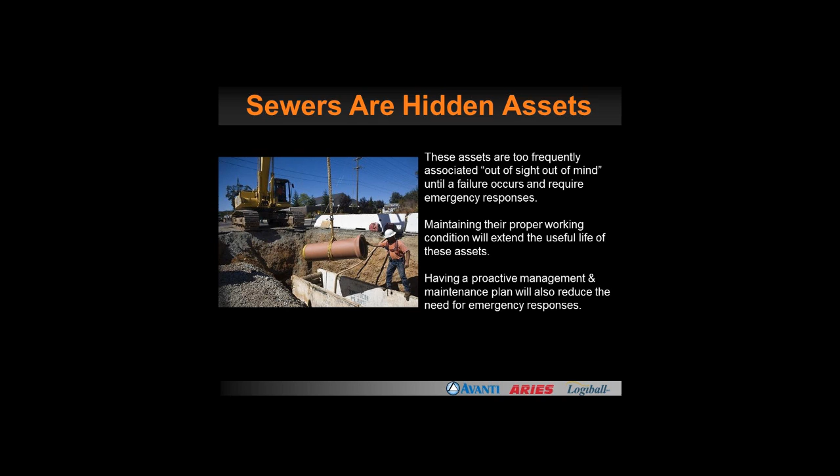These assets are too frequently associated with out of sight, out of mind. Here's a piece of pipe being laid. The pipe is only a part of the system. In order for the system to work correctly, the pieces of pipe have got to be aligned together. Maintaining their proper working condition will extend their useful life, and having a proactive management and maintenance plan will also reduce the need for emergency responses when we have failures.

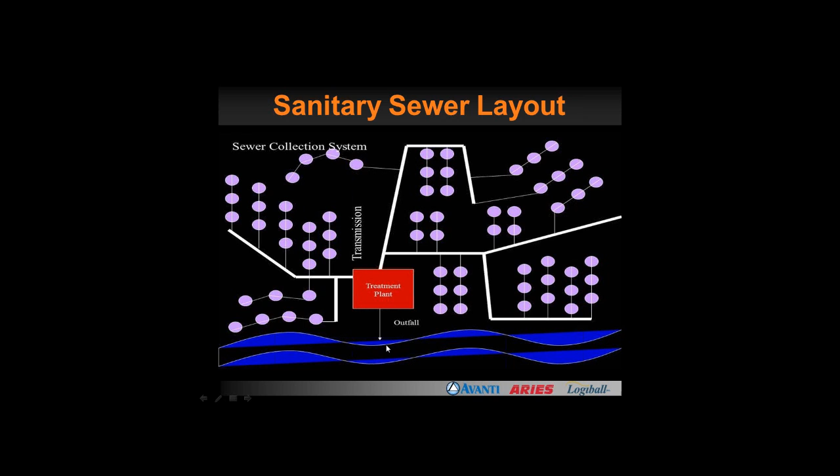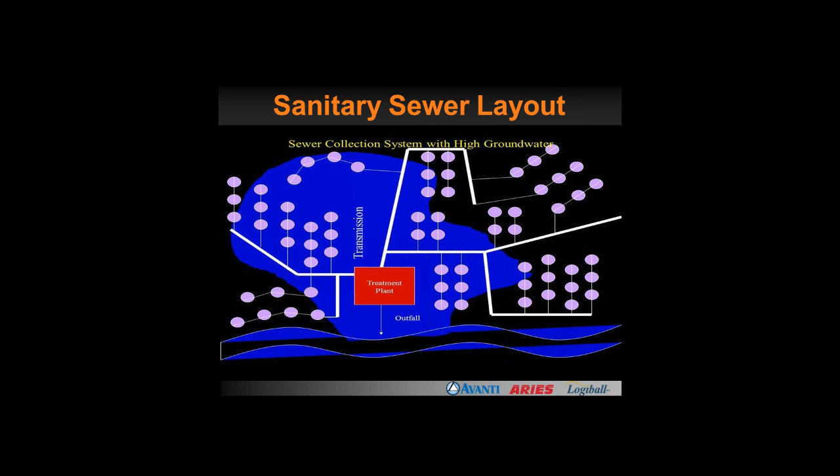Here's our sanitary sewer layout. We have our manholes, our main lines, laterals, and transmission lines. All of these are directed at the treatment plant where they will be treated before being released back into our rivers and streams. In some cases, part of our collection system is underwater, and if water has chances to enter our collection system through the joints, laterals, or whatever openings are there, we will get events like surcharges and SSOs.

In our sewer system, we have our manholes, easily accessible, we can open them up and people can go down and fix these things. We have our joints, which allow groundwater to come in, and our service lines, which are basically the least accessible and which eventually contribute a lot of groundwater infiltration.

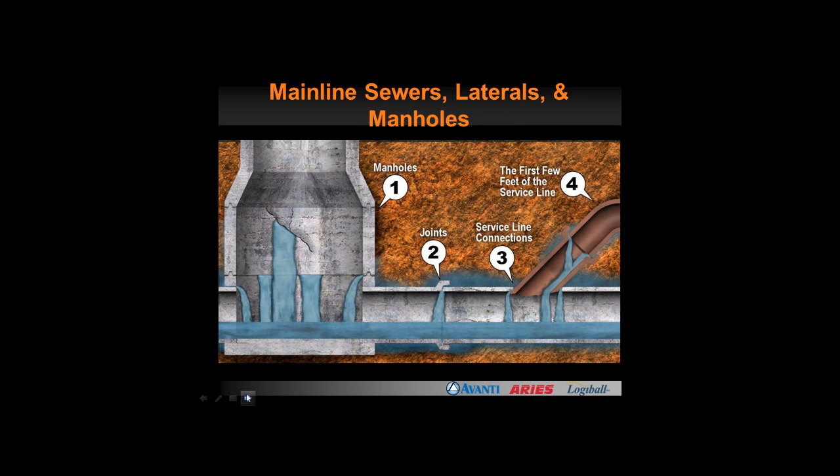So what's the problem with I and I? Well, according to the EPA, infiltration and inflow represent almost half of all the flow at the treatment plants. So it becomes a huge problem. It's our tax dollars at work, and it also means overflows can happen and basically damage the environment.

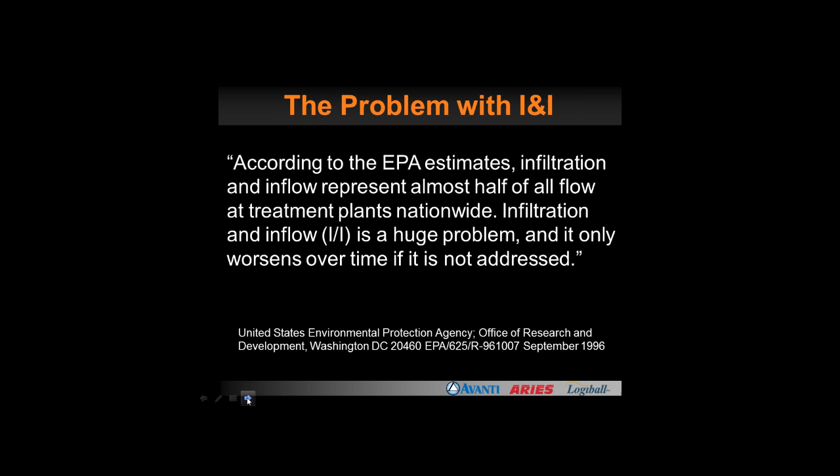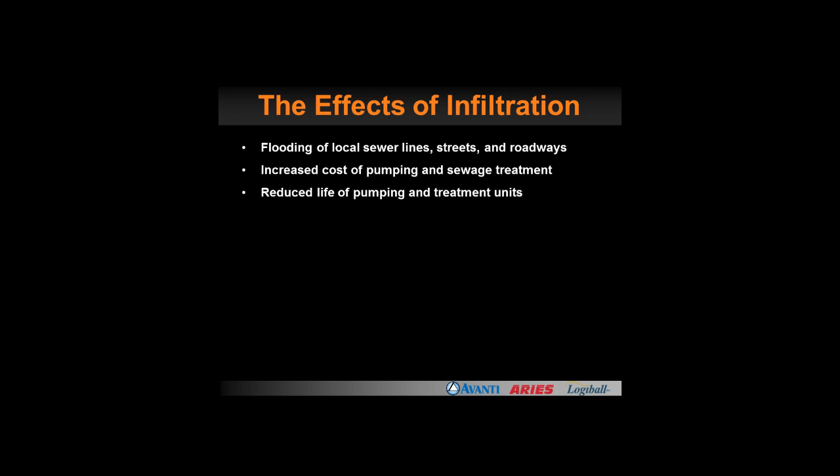Flooding of local sewer lines, streets, roadways. Increased cost of pumping and sewage treatment. When that pumping station's running 12, 15 hours a day versus 8 hours, it's money basically going down the drain. If that pump is also working 15 hours a day, that means its useful life will be decreased over time.

Increased risk of SSOs resulting in fines. Depositing of fine soils resulting in reduced capacity of the sewer collection system. As groundwater enters the system, so do some of the fines of the backfill.

These fines coming in create areas of loose soils adjacent to the defects, so we're not supporting our joints or connections as we used to. This is a potential loss of backfill support for the pipes, which eventually can result in structural issues and failure of the pipes.

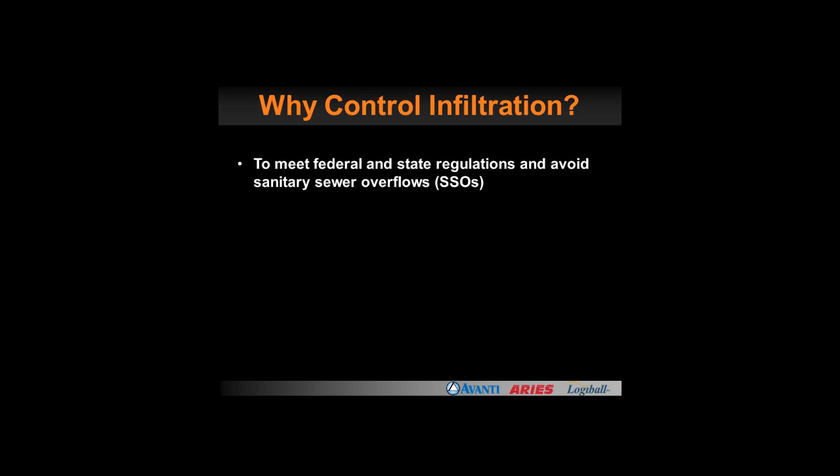So why control infiltration? Well, basically, first thing is to meet federal and state regulations and avoid these SSOs. Reduce our costs in the operation and maintenance of these systems. Avoid man-made sinkholes and damage to transportation infrastructure and other infrastructure, and reduce treatment costs of the wastewater.

No one likes to see their sewer bills go up. And of course, we want to extend the life of this precious asset.

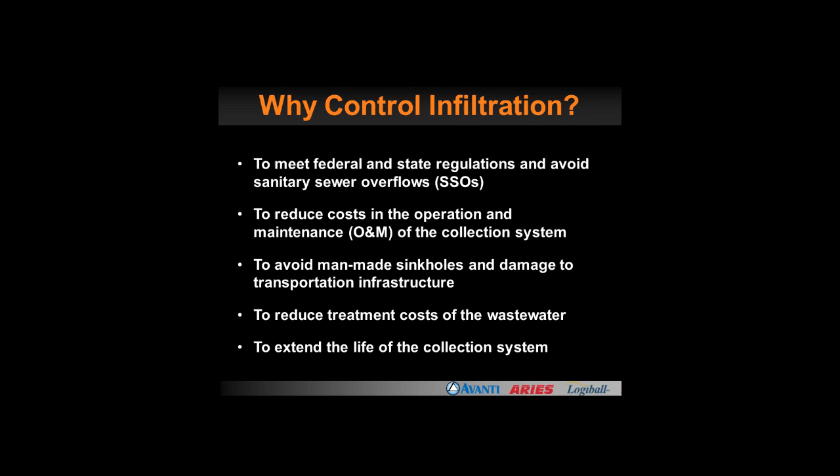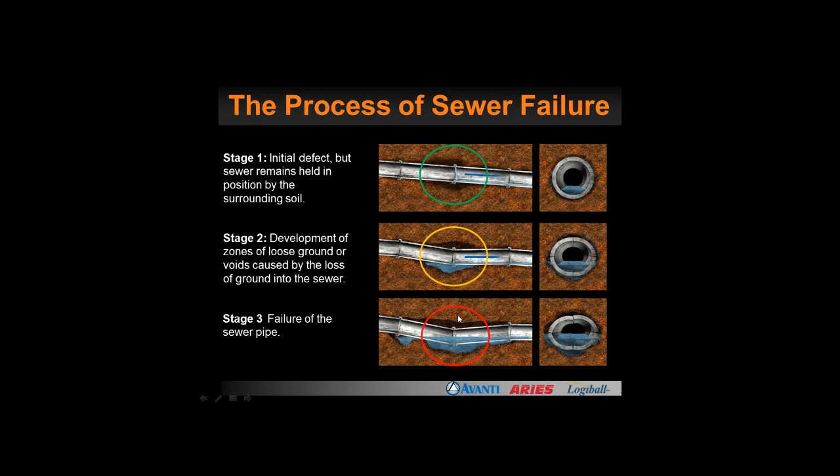On the left here is a view of what we see with CCTV cameras. We have a circumferential crack, which is basically like a joint, which allows groundwater to come in. As this groundwater comes in, so do fine particles.

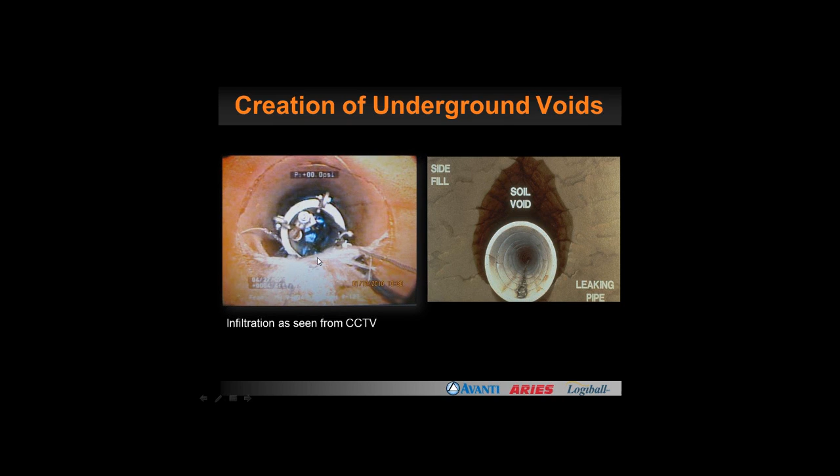And if you look at the picture on the right, eventually we get voids on the outside of the pipe. So it's not only the groundwater that we have to treat, but it's whatever's on the outside of the pipe.

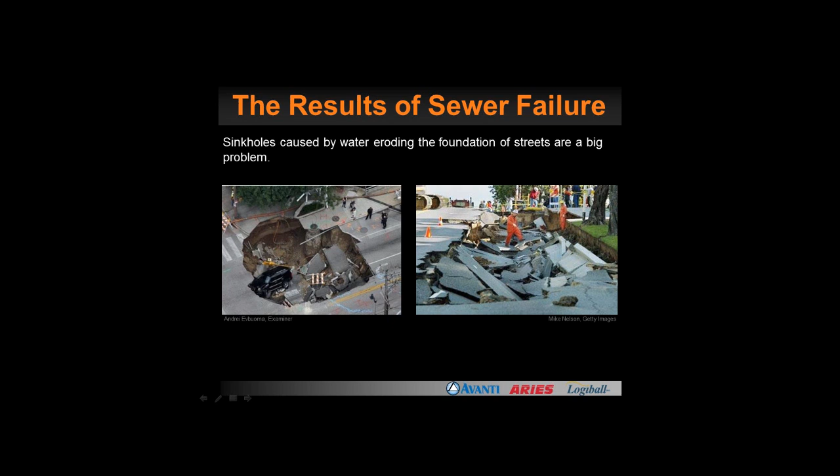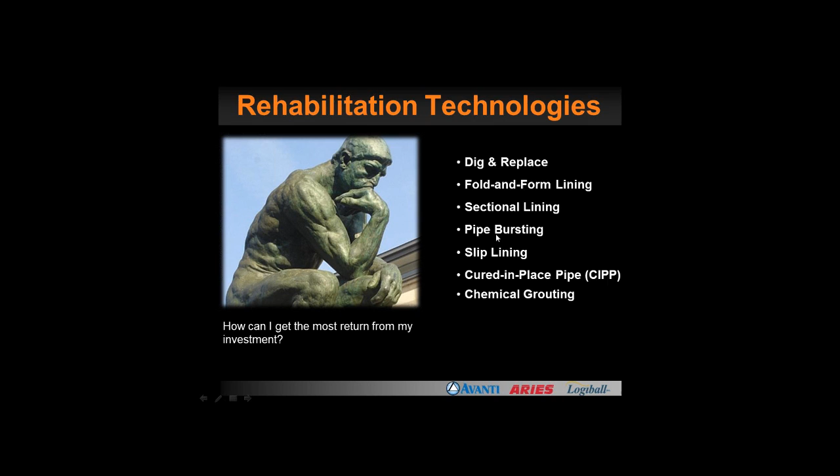So how can I get the most from my investment? What do I need to do? What can I do? Well, we have options: dig and replace, fold and form lining, sectional lining, pipe bursting, slip lining, cured-in-place pipe, or chemical grouting. Which one will stop the leaks?

First, what is chemical grouting? Basically, it's the injection of two components that are pumped in and around voids, the pipe, and manhole structure to stop infiltration and exfiltration, stabilize the surrounding soil, stabilize the pipe in return, and seal the annular space between the host pipe and the liner.

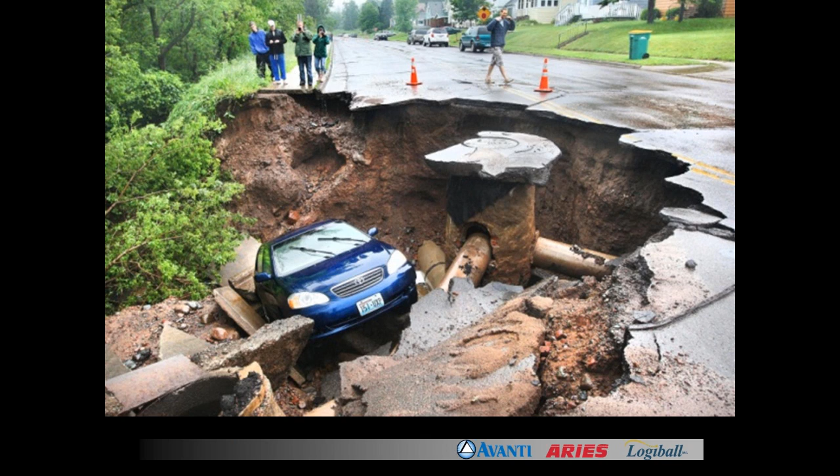Something that this photo does for me also is it reminds me of the fact that it's a whole system that you have to stop the infiltration in. So you can't address only the main line, you also have to address the laterals and manholes and so forth. And even if the municipality says we're going to do lining of main lines or lining of manholes, you still have to stop the infiltration in order to put on that coating for the manhole or put on that liner.

Similarly, you could just drill a hole straight through the manhole and pump the same chemical that they use to seal main lines and laterals. You could pump it into the soil and encapsulate the manhole. It takes about 60 gallons of grout if you have a standard 10-foot by 4-foot manhole.

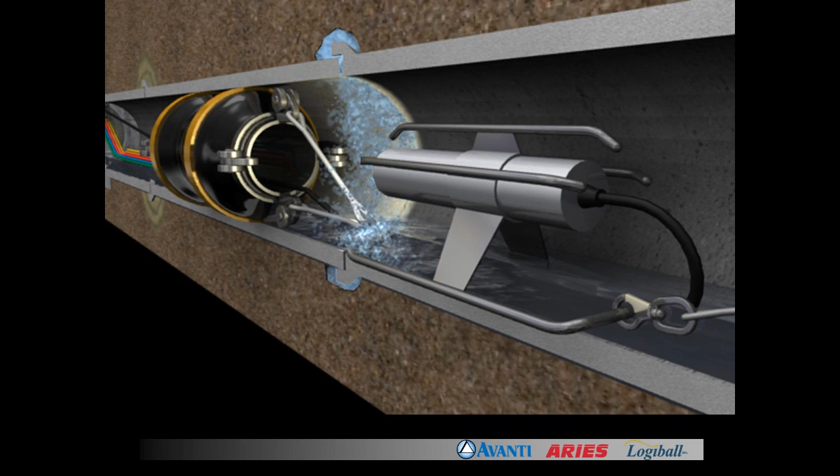So they're going to stop the infiltration here before they line it. If you're in a mainline scenario, contractors will often, before they line, grout the gushers, the highly active leaks in the main lines, because that infiltration coming in could cause a bubble in the liner, which will decrease the capacity of the pipe.

The municipalities don't want that for sure. It can also cause resin washout, which will weaken the liner at that point. So they may grout beforehand, and then after they're done lining, they could just grout these cracks at the lateral connection.

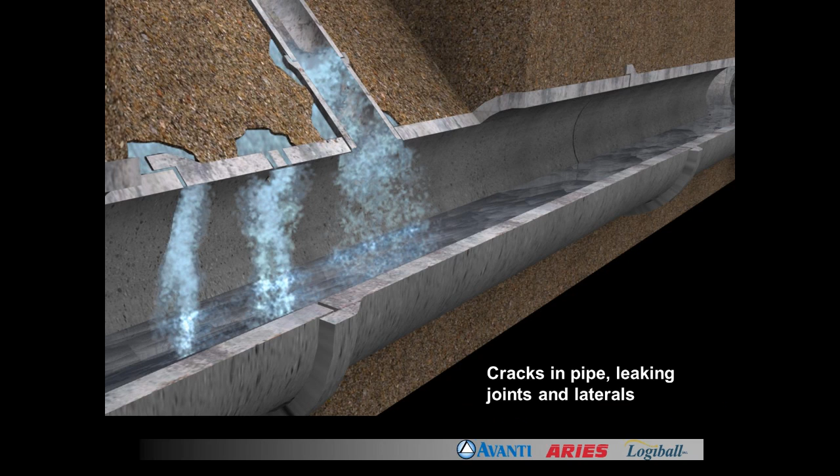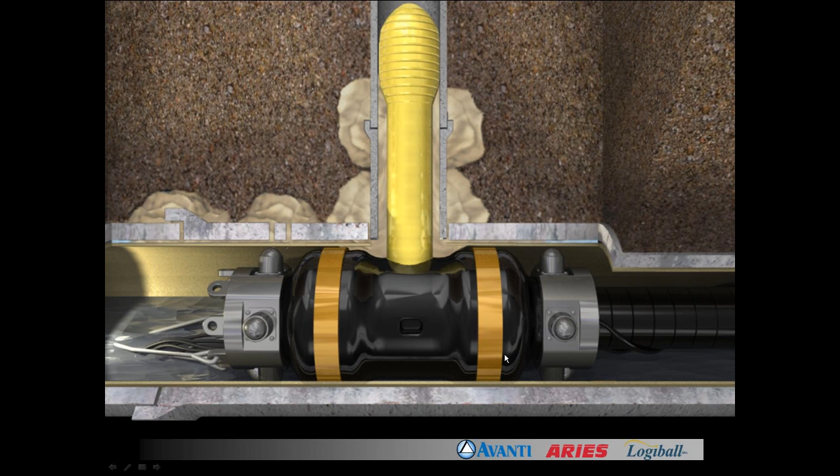So they can position a packer over it, and the grout, because it's the same viscosity as water—about 1.2 to 1.5 centipoise—travels in the annular space between the host pipe and the liner and cures, becoming solid. It also goes out the cracks or joints into the soil on the outside, and that's really the goal. That's where you want it.

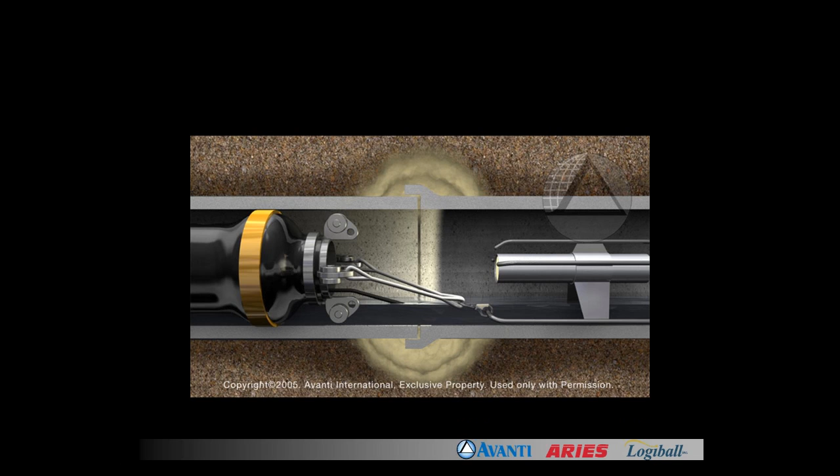There are several myths about grouting, one being that the grout only seals the joint itself, where the red circles are, only an inch or two. But the reality is the contractor should pump enough grout to get it into the soil. It's really a soil sealing process—it fills all the voids between the gravel or sand and creates what we call the gel soil matrix.

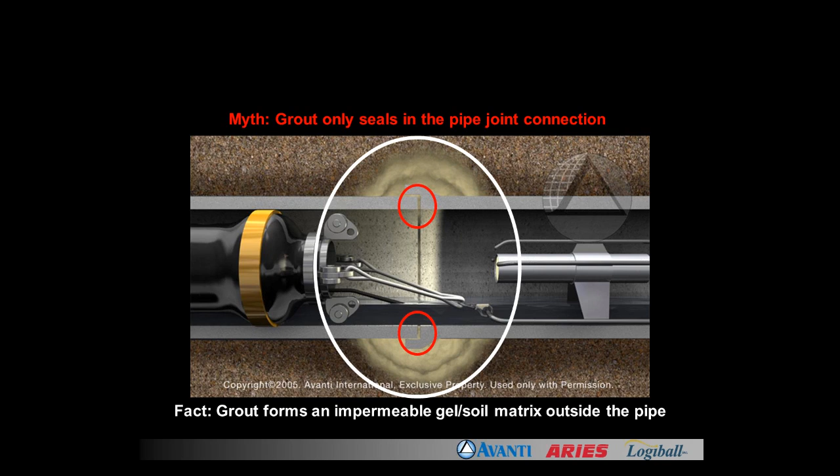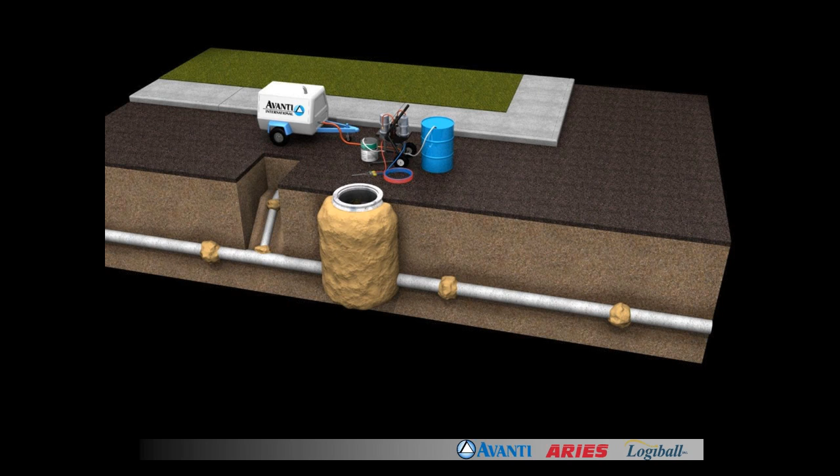This is a great image, and if you can take that one and lay it over, this is an animated version. You can see this is the completion of grouting the system. Maybe they started with the main lines here. You've got your grout donut, the lateral connection, several feet up the lateral—usually it's standard to go 3 or 4 feet.

There's a very well-known case study where they went 38 feet up the lateral and sealed every defect in the lateral. The manhole has also been encapsulated, and rather than chase the water from crack to crack in the manhole, if they curtain grout it like this, then water can't even get to the structure, just like water can't get to the joint here.

So much of this presentation is about sealing the entire system, and I'll introduce you now to Dick Schatz, who's going to talk more about it.

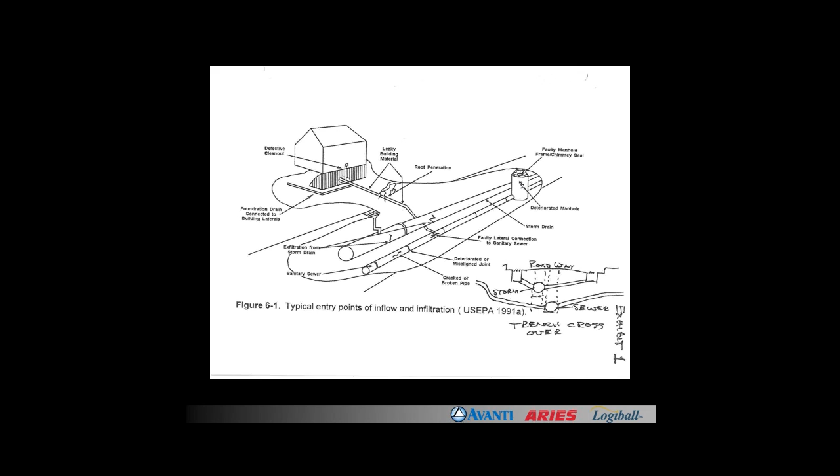You heard earlier 5 billion feet of sewer pipe. Of that 5 billion, if you just look at the collection system alone, it's at least 1 billion feet for just the collection, not the services, not a lot of other things. But take that and look at it, you're going to have at least 500 million vitrified clay joints poured prior to 1970.

In the 1970s, we switched to more modern synthetic rubber joints, and things certainly improved. But here you can see the old hand-pour job going on: fill the pipe in behind it, pour the joint, move on. What you have here is beautiful vitrified clay pipe that will last 200 to 400 years. But your sewer won't last that long because your joints are going to fail. You lose your joints, you lose your sewer system, slowly but surely.

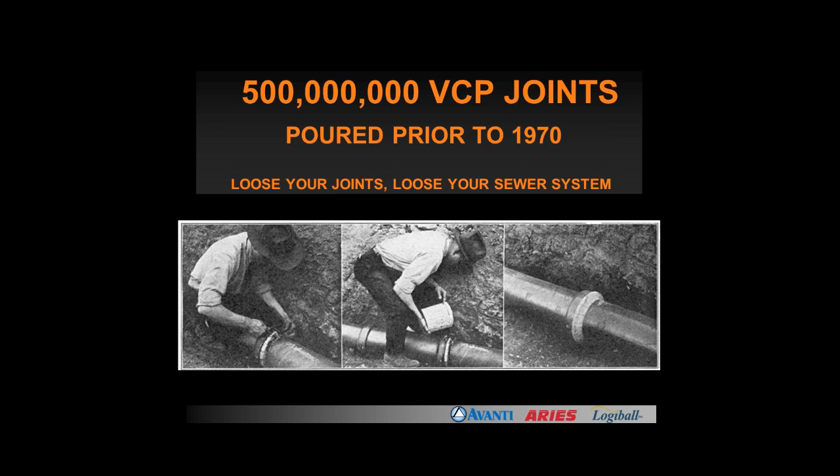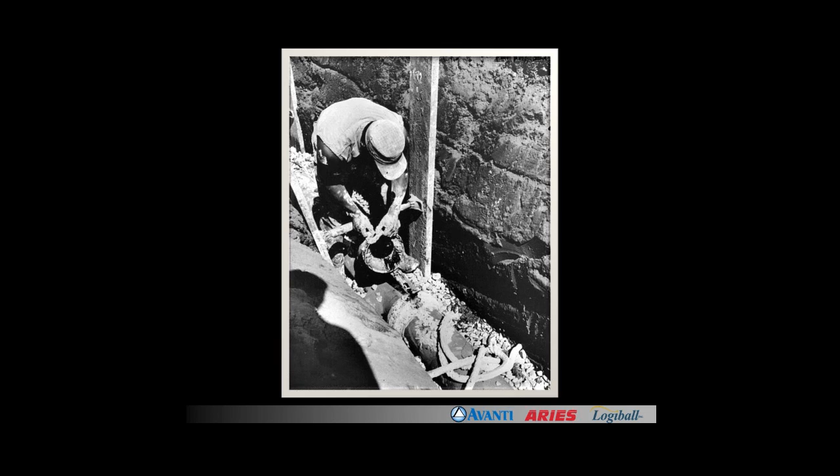Here we are pouring more joints. You'll notice sand on the outside, a great big dug trench. This whole thing creates an underground, you might call it a French drain, on the outside of the sewer pipe. So anywhere there's a failed joint or a place for water to enter, it'll enter into the sewer system. Here you see gravel used as backfill.

Joint air testing and grout sealing is a solid, proven way to sustain your vitrified sewer collection system, because you've got to do something to those joints. You cannot line every pipe. You've got 2 and 3 foot long pipe segments, 8, 10, 12, 6 inch, and that's the majority of your collection system. Those joints are every 2 or 3 feet, and therefore the chance of failure over time is extremely high. First 1 or 2, 3 or 4, but over time more will fail.

So we talk about sewer system maintenance. It really is a 3-step process today: you clean the pipes, you TV inspect, and you evaluate. That's what we probably have been taught to do, every 10 or 15 years is the theory. I don't know if that happens in many municipalities. Sometimes I know they're going through for the first time. You can tell by the amount of solids coming out.

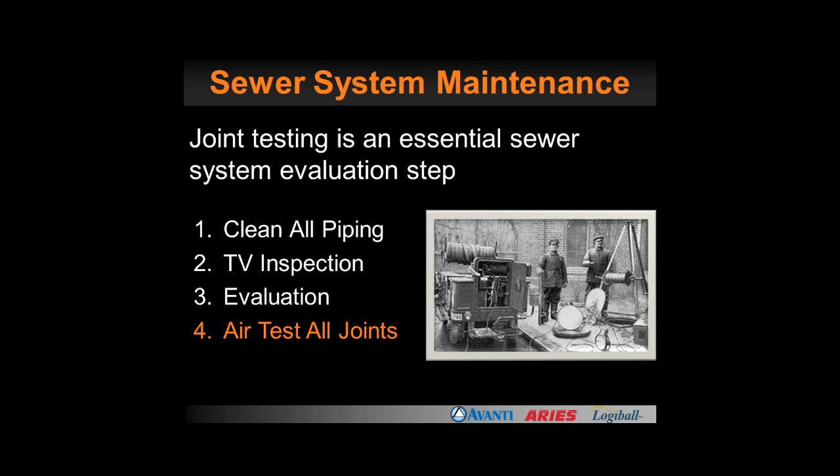The next step we really have to look at is to air test all the joints. If you do a manhole-to-manhole run of about 300 joints, you're able to tell if 2 or 3 or 5 joints are failing, or if none of them are failing. So that's an important step.

If you're going to test the joint, it's very easy at the same time to grout the joints that have failed. So if you go into a line and you test 100 joints from manhole to manhole, and you find 10, 15, 20 joints that fail, you grout them. You now have sustained that sewer system. Now you're able to write a meaningful evaluation of that inspection, because you did both the physical inspection for cracks and breaks, and you did the joint test, because you can't tell failed joints just by looking at them. You would say, oh, I see the staining, but you don't always see that staining.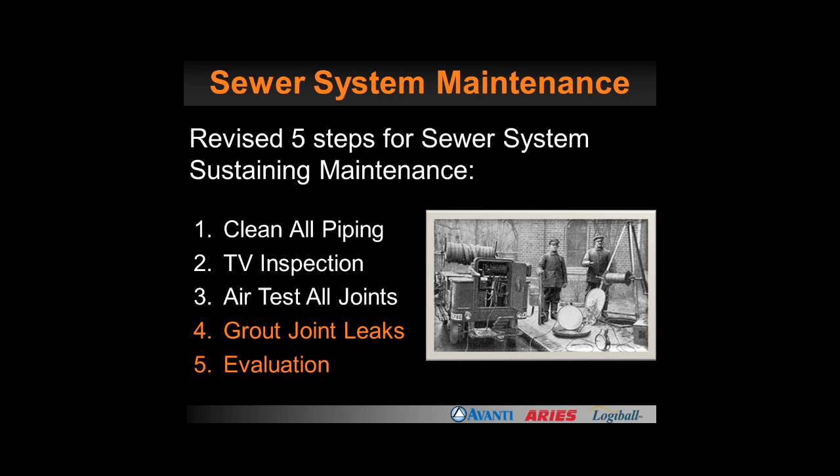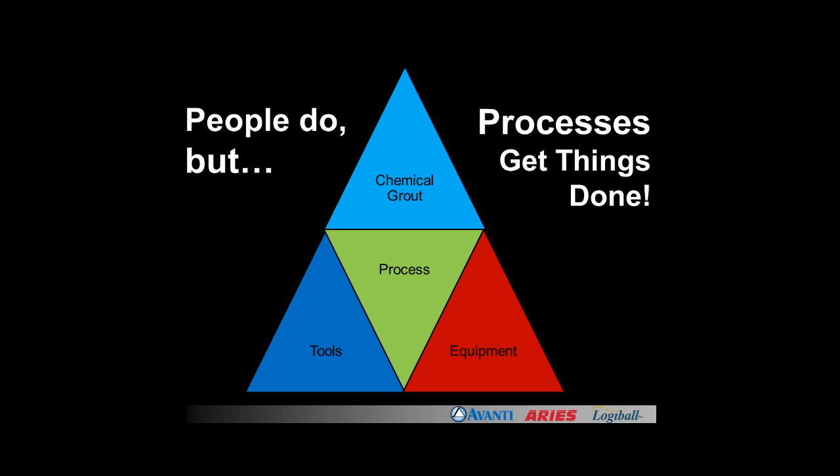Okay, what is this thing, this test and seal process? We're going to talk about that next. Basically, people do things, but if you get a process going and a system, processes are going to get things done. And that's where the three of us have come together: chemical grouting with AVANTI, Logiball with the tools, ARIES with the equipment, and you have an integrated process.

So the test and seal program, if you're going to have a program in your community, it's basically 5 steps that have to be taken to be successful. You've got a process—that's the grouting process. You have a system—those are the tools and equipment that make it happen. You have procedures to be followed, not just doing it however the last guy told you. There should be a more organized procedure for carrying out the work. And records have to be kept.

10, 15 years from now, or even shorter, a week from now, a month from now, or 2 years from now, will you be able to tell which joints were grouted and how much, and which joints passed the test but 2 or 3 years later fail and need to be grouted again?

The 5th part is education. With the turnover in people, both at the community level and due to age, education is an important step in this whole process.

Let's talk about the process itself. One is air testing. We're testing the joints for watertight integrity, stopping infiltration and exfiltration. Both of those things are damaging to the backfill, and the backfill is what supports the joints. Originally, some joints had no joint material at all, then tar was used, or oakum, or cement, whatever they had.

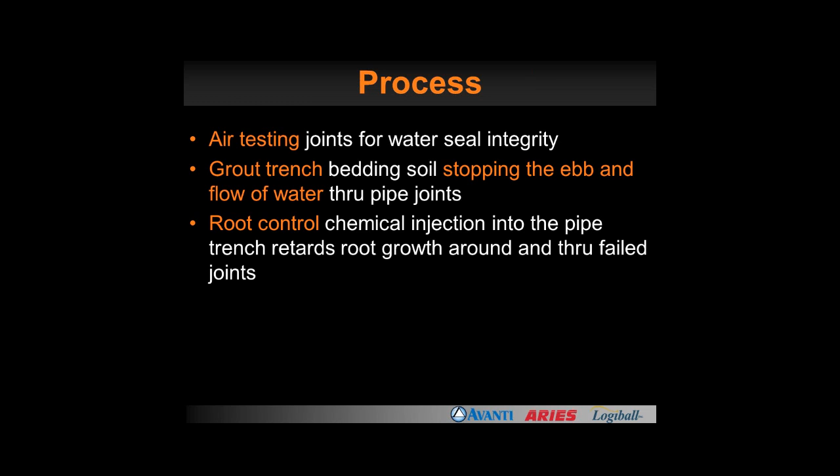Lastly, we don't talk about it much, but during the grouting process, root control chemicals can be included in the grout mixture. While it may not stop roots, it will certainly retard them if you inject enough grout. That's important because roots are very hard on sewer joints - any little crack, a root will crawl through it.

The system is basically an integrated TV, air testing, chemical pumping and injection setup - equipment designed to arrive on a job site, a manhole, and achieve the desired results. The chemicals are designed and mixed to achieve that sealing objective in the environment they exist in, underground, being diluted with or displacing groundwater depending on the situation.

Test and seal joint packers - these are the actual tools located over the joint, and you've seen how those work earlier.

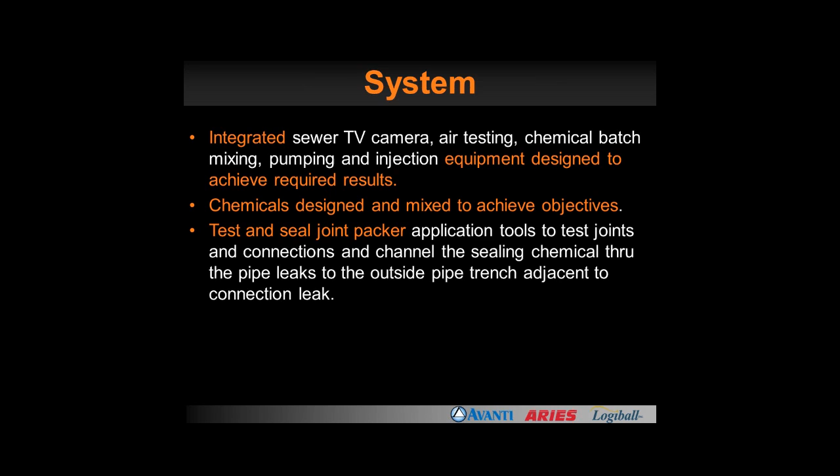Procedures - all these things fit together: methods and specifications, and confirmation tests that the equipment is performing correctly, because the operator can't see the equipment. All he can do is watch his monitor, his meters and gauges, in the control room.

The chemical mix confirmation: is the grout mixed the way it should be, as instructed by the chemical grouting company that supplied it? Test and seal - the results have to be confirmed. Is the joint in fact sealed after you inject the chemical?

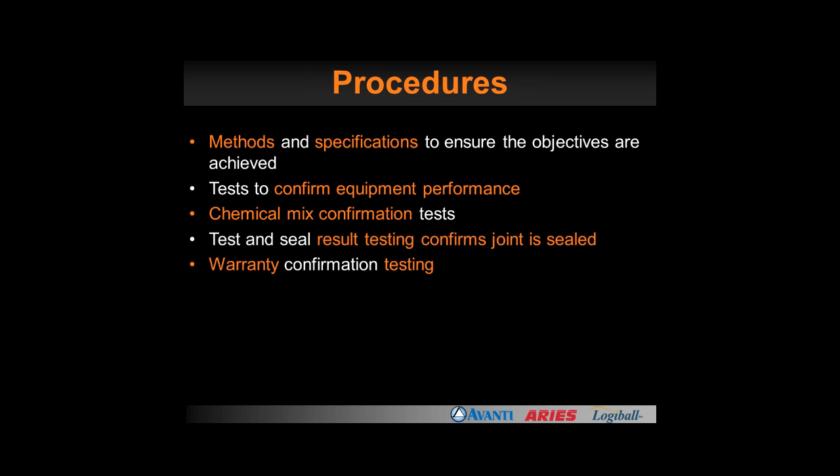And lastly, procedures require warranty testing. This is stuff Mark touched upon earlier. It's part of the ICGA recommended standard.

Record keeping - you're really talking about 2 types of records. One, you've got a grout mix data sheet. Here you keep track of the job, some information about the sewer, the packer to know how big the void is, and what the grout mix itself is.

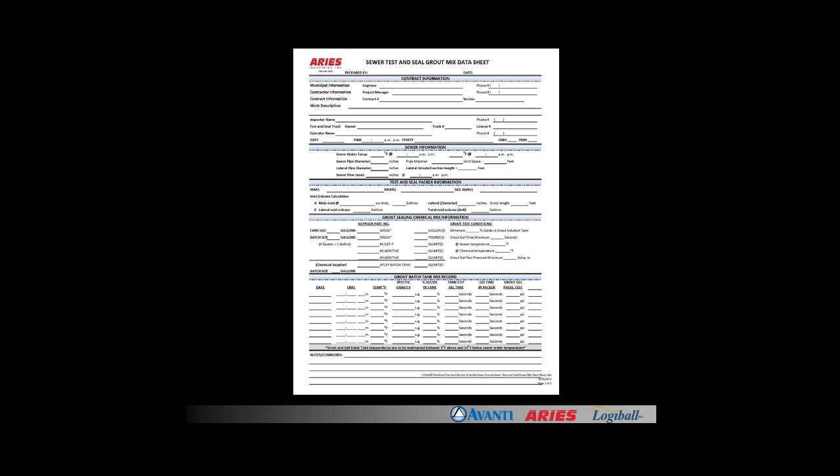How did you mix it? What was the chemical ratio? Did you mix that every time? Below that, you keep a running record of every mixed batch.

Education - this has been a tough one. About 8 years ago, the three of us - AVANTI, Logiball, and ARIES - started the Grout Boot Camp. It's held once or twice a year, with anywhere from 15 to 30 people.

It's a hands-on grout training course. We review the grouting process and the specification requirements. We talk about the new NASSCO ICGA spec, the equipment, and its operation and maintenance. This is all hands-on. Chemical safety is an important step.

Chemical mixing and testing is another step that isn't really common on many trucks. The tools - the grout packers and the injection guns - how do you maintain those, how do you fix them, how do you make sure they're running right? And lastly, there's system integration - you put it all together and show how it works.

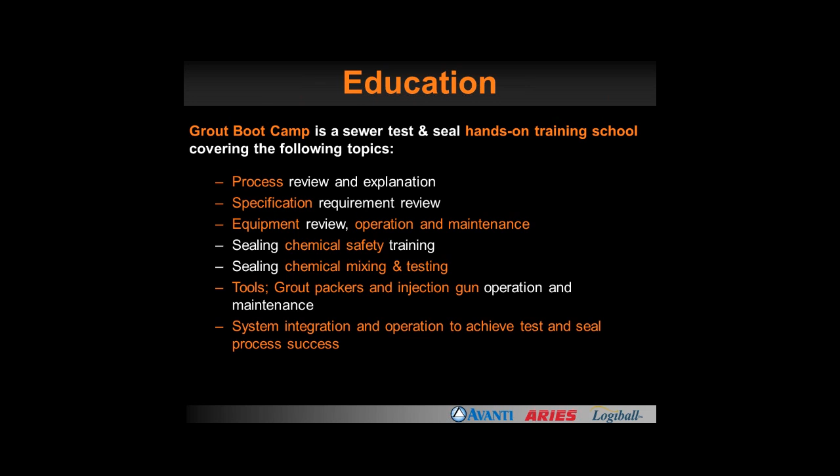All right, Dick, Don, I think it's yours.

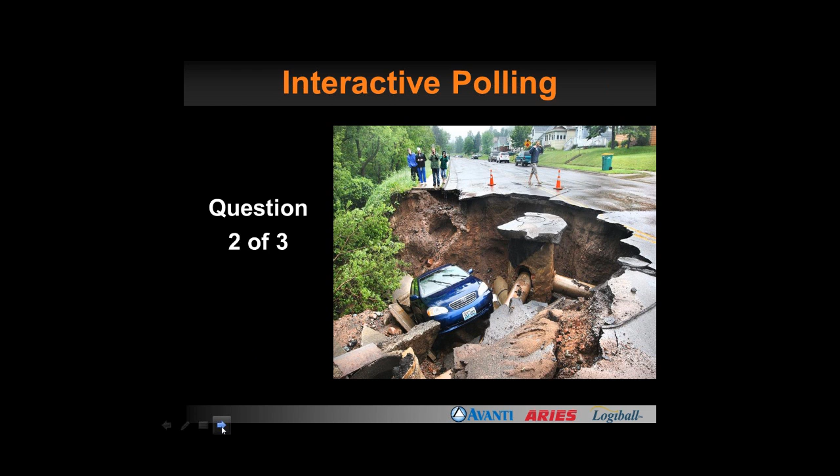I wanted to indicate that we're halfway through time-wise, and we've got a lot of material to cover yet, but I wanted to direct one quick question, I think to Daniel. It's November, I'm in the Northeast - is there a seasonal aspect to grouting that I should be aware of?

Certainly grouting happens more in the warmer times, but grouting can be done all year long. It's just a matter of whether the ground is frozen. Typically 5 or 6 feet underground, the soil and the infiltration point is not frozen, so it can be done all year long.

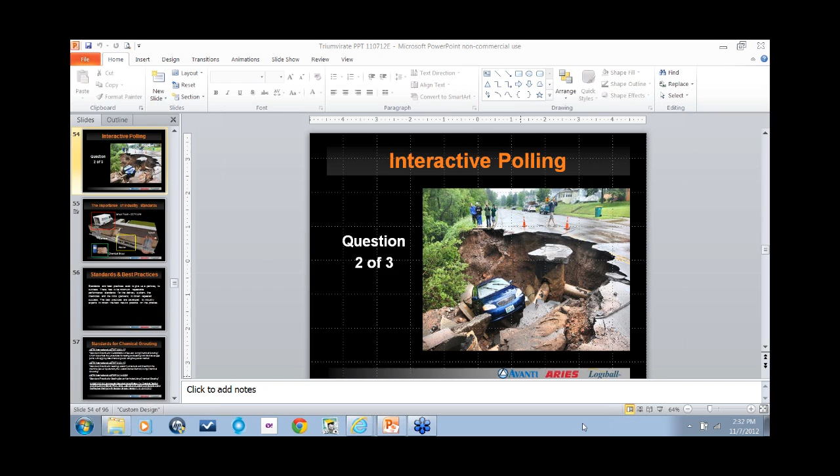All right, let's go ahead and launch another interactive poll question. I just love these. What technologies do you currently use to control infiltration? In this case, I'd encourage you to check all that you do - you may check more than one.

It'll be interesting to see how we all fare here. If you're an engineer, what do you recommend? If you're a contractor, what do you do? If you're a municipality, what do you support?

Fellow presenters, if you can see this, I think you'll see where point repair, sectional liner, and cure in place are tied for first place, chemical grouting second, followed by pipe bursting and fold and form. Sometimes our presenters can't see this, and this kind of hinges on what we do in the back end of the presentation. So duly noted. Thank you for your contributions here.

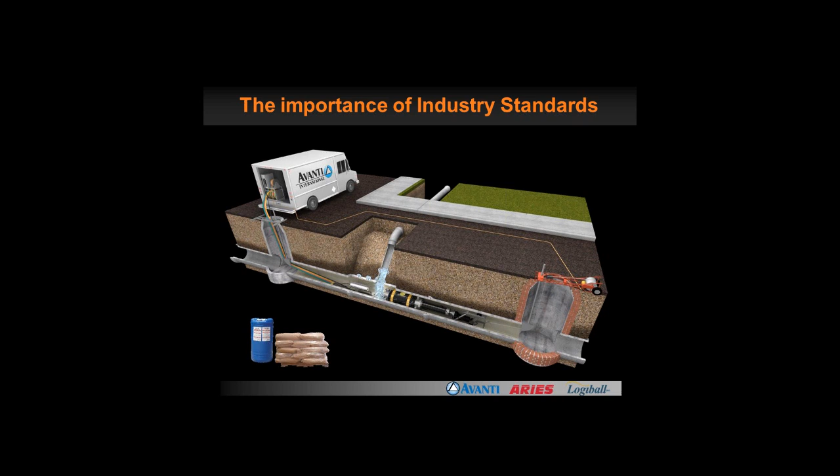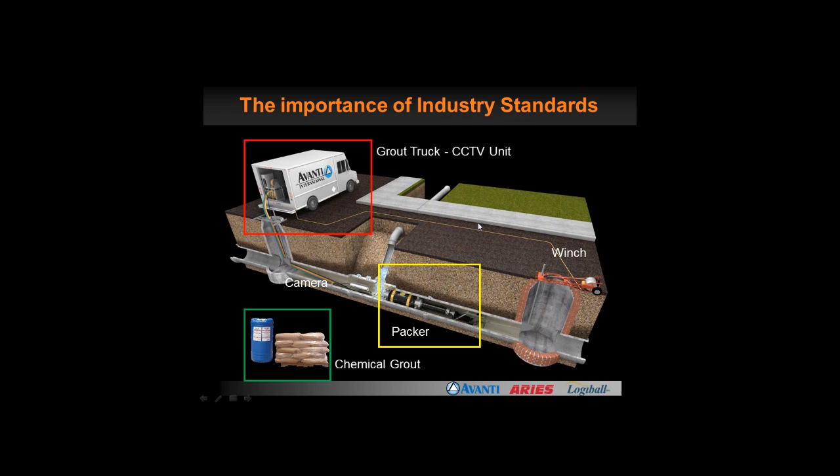Thank you. As in any process, an industry basically develops standards for its operational procedures. So in our industry, we have standards for the delivery equipment. We also need standards for the tools being used to fight this infiltration, and of course standards for the chemical grouts being used.

So the standards and best practices, what they're basically doing here is giving us a pathway to success. That means there has to be minimum repeatable performance standards for all of these items, whether it be the delivery system, the chemicals, or the tools, to obtain repeated success.

So best practices are basically developed by industry experts in conjunction with these standards. If I go back about 8-10 years ago, we're looking at standards that were developed by some NASSCO members back then, along with the ASTM group, and developed standards for mainline sealing of joints, for manhole sealing, and for lateral connection sealing.

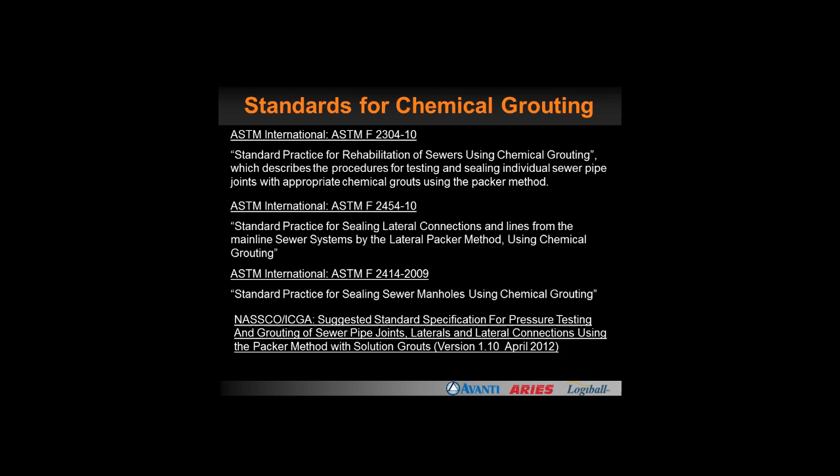And as of a recent effort by the ICGA along with NASSCO, a new suggested standard specification has been developed as early as April this year, which you will get, I believe, a copy of at the end. So all these documents refer to

equipment or process that have to be verified before we go out and do some work. So in this case, for the tools, the work begins with an above-ground test in order to make sure that everything is working correctly, the integrity and performance capabilities of these tools.

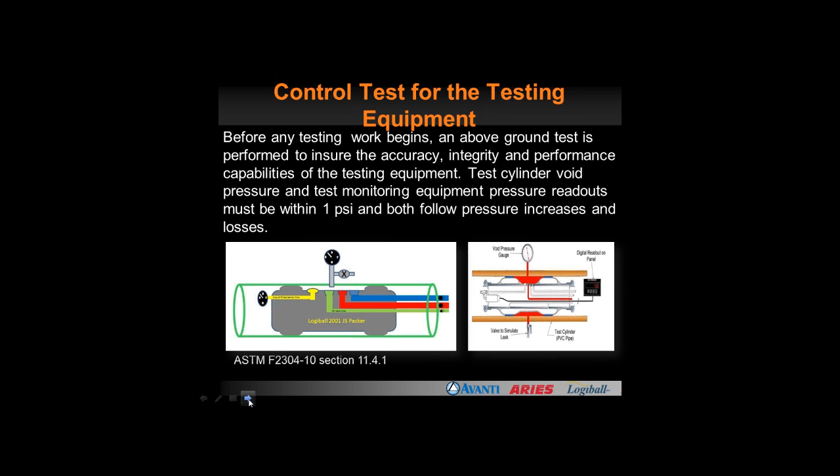So basically, we have an above-ground test cylinder, or PVC pipe, which is drilled, and has a pressure gauge and a valve to make sure that all the integrity and everything for the testing equipment is working. So whatever we're seeing in the truck on the gauge basically matches what's going down here. All these are required in the ASTMs and in the NASSCO specs.

Another issue we have to look at is the combined grout pump output. These chemicals are being pumped 1-to-1, so we need to make sure that we are within a certain percentage of pumping 1-to-1. By doing this test, we're also measuring how fast we are pumping this grout out, which will be useful information when we are deciding on the gel times.

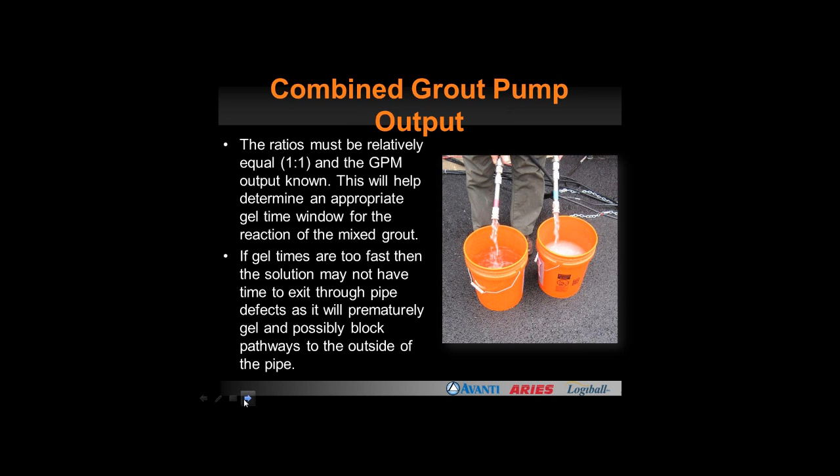The other thing we have to look at is what are we pumping? Typically, we're building 30-gallon batches, which basically means a 20% concentration of solids in a 30-gallon grout tank. When these two are combined, the A-side and the B-side, it now becomes a 10% solids content. That's fine, that's a great starting point.

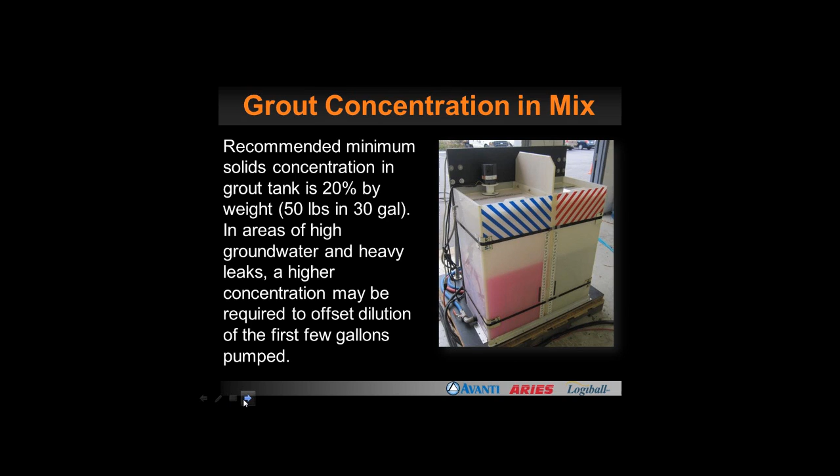In some cases where we have high infiltration, or we're near a stream and we know we are going to get a lot of dilution, it may be considered to increase the solids content, because the first few gallons of grout pumped may be diluted.

Cup test: this is done to confirm gel times above ground. This test should also be performed when there are temperature changes above 10 degrees Fahrenheit, when mixing new batches, or the next morning if the truck's been sitting overnight and nothing's been done to it. We might as well check the grout in the hoses by recycling them first.

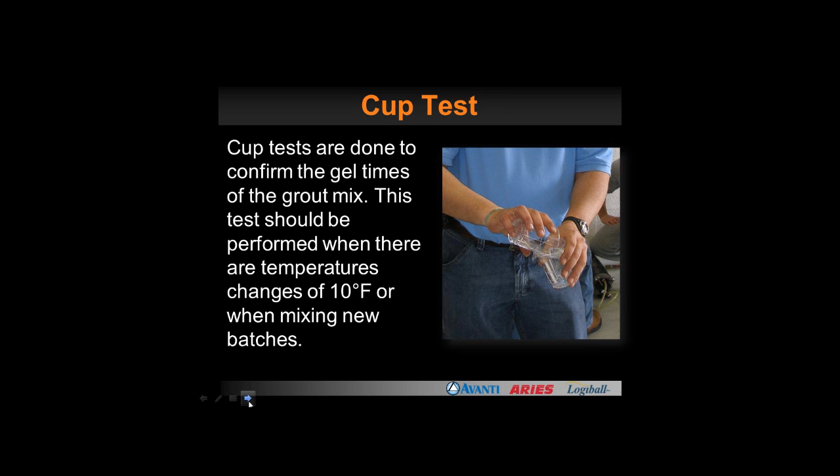So, standards for sewer grouting. For years, this industry and technique, chemical grouting in sewers, has been referred to as an art and a science. Well, the addition of recent standards, best practices, specifications, and testing are turning this technology into more of a science.

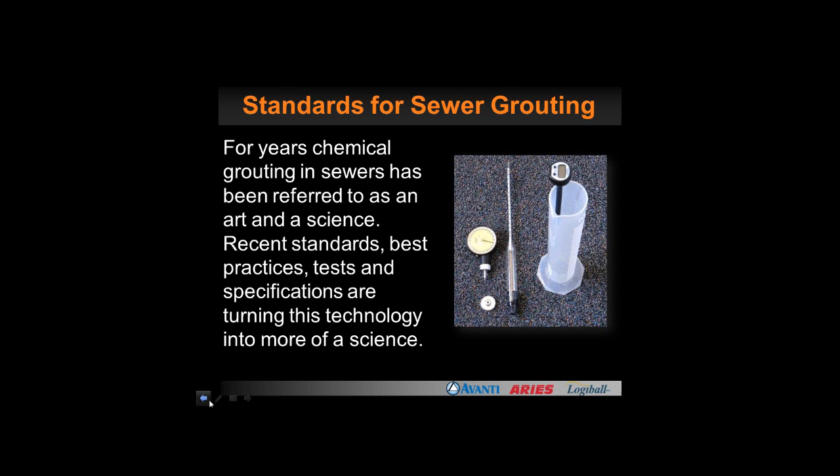I'm going to talk a little bit more about the process itself. The real message here is that test and seal is a process system. If you treat it as a process and do it in a systematic way, it's going to yield predictable results. That's really what you've got to keep in mind, because as you could see from all the examples, this is out of sight - you really don't see what's going on. The chemicals are going out into the soil, and you have very little knowledge of what's actually happening as you pump. I'm going to touch upon that again.

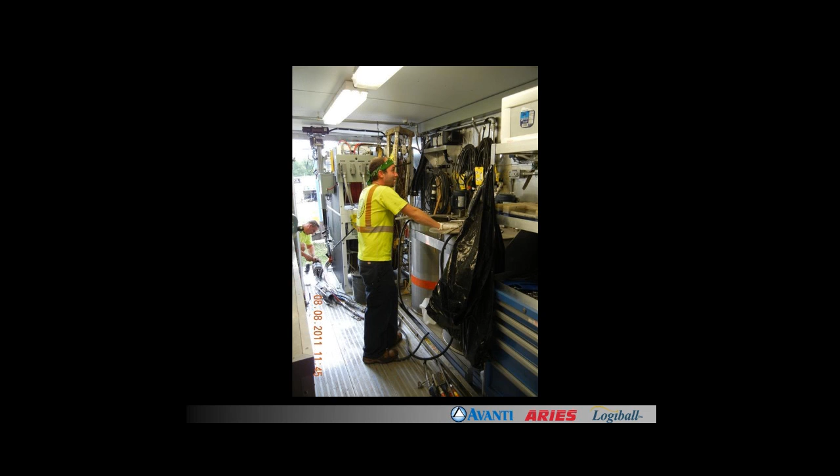To the operator: he mixes these chemicals in two tanks. Here's two really nice stainless steel tanks I'm proud of at ARIES. And of course, this is what a truck is more likely to look like, with lots of gear hanging all over the place. These guys go on the road, as you know. There's a lot to be done, but the operator here is just finishing his chemical mixing.

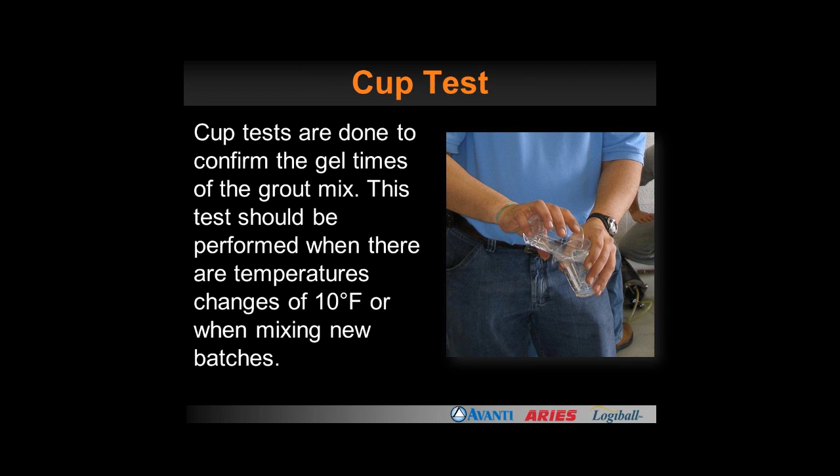He will do the gel test that Mark just spoke of. It's a very common test. You usually are generating a gel that's somewhere between 20 and 30 seconds for 8, 10, 12-inch pipe. But there's other things you can do.

The next question is, how was it mixed? Did you actually have a full bag? Is the chemical behaving properly? Here's an operator using both a thermometer and a hydrometer - that's like you would measure the density of a battery solution.

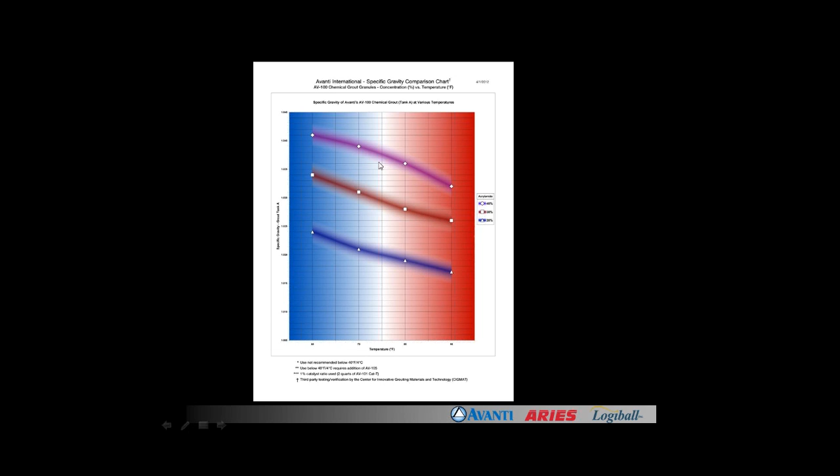And with that information, you can actually confirm the solids content. The lower line is 20%, the middle red line is 30%, and the top line, kind of pink, is 40%. Now that's what you would have in your grout tank - easily done on a truck.

This is the original data we actually took. We went all the way, working with AVANTI, from a 10% solution to a 40% solution in the grout tank. And we monitored the specific gravity - that's this line here - versus the temperature. You'll see it is temperature dependent, but these lines, as much as they are, you'll notice they're about three-quarters of an inch apart on a graph. It's very easy to take these readings. It looks like it's extremely precise, but any operator will be able to do that.

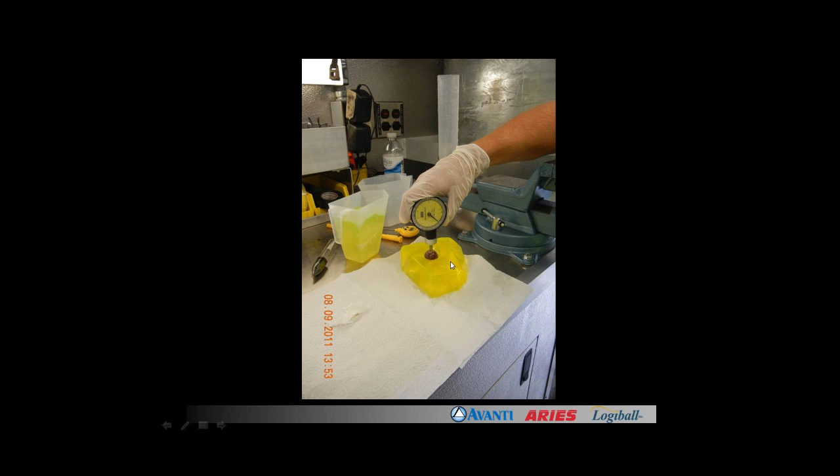In fact, this one operator we were working with in these photos took great pride in being able to do this. He said people often ask him, what do you got there, what's your mix? He said, I don't really know, I just tell them I put a bag in and I put 30 gallons of water. But here you can see - here's the second test we've been experimenting with.

It's a force test. That little meter there is nothing more than a force gauge, which means it reads in pounds, and the bottom foot has a 1 square inch area. So when you push down, you basically have a reading of pounds per square inch. Simple way to get a reading.

It's interesting if you noticed, but here I'll go back a minute. This reads about 5 to 6 pounds per square inch. That's pure grout, okay? Just pure grout of about 12% solids.

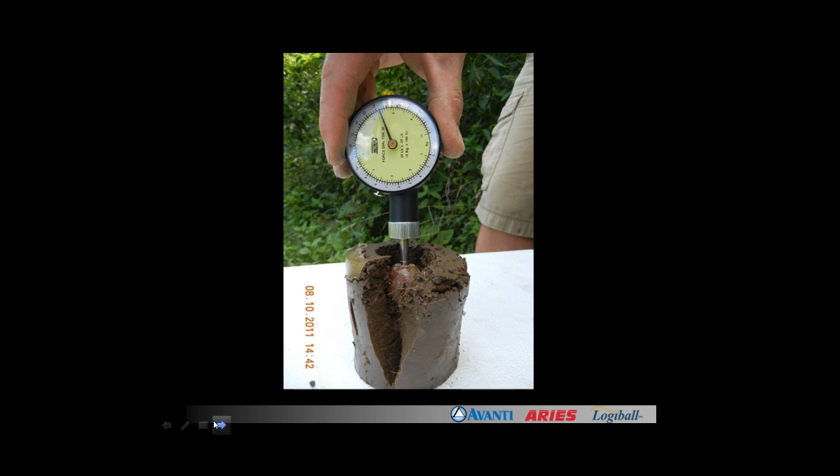You take and we mix that same grout with mud, and I mean it was mud, so we diluted it by roughly 50%. In other words, we now had a much lower solids level. And then it gelled, and you'll see here the force is up there around 15 or 16 pounds per square inch. Grout in soil is really much stronger than people give it credit for.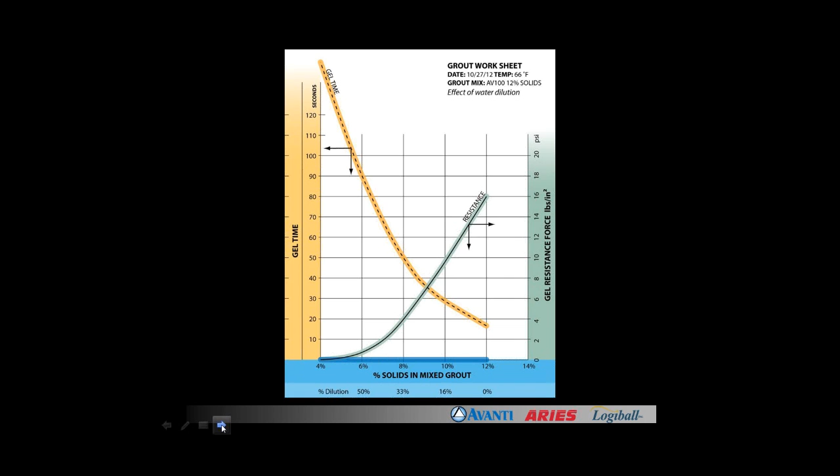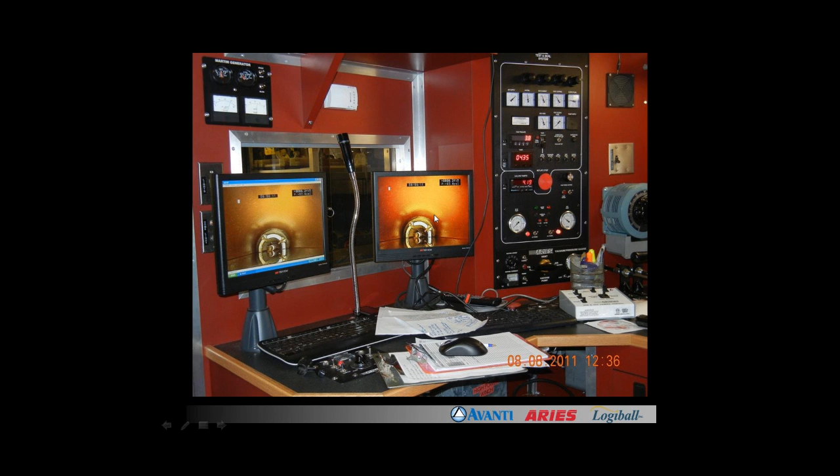He's got two monitors. You can see the packer here. He has information on the screen, footage, the pressure. We call it the void pressure. Right here on this grout panel, here's the void pressure reading. Here's a timer, and here's the number of gallons pumped. Down here we have the discharge pressure of the two pumps.

This is his home. This is where he operates out of. Okay?

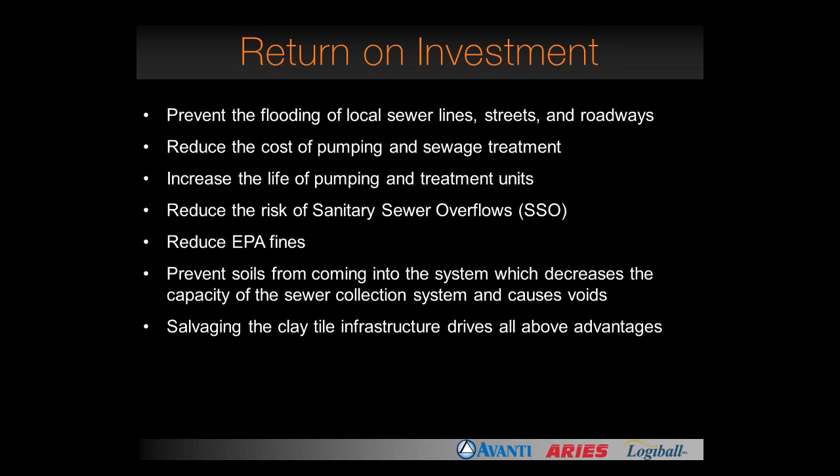Some of these we've covered, the benefits of grouting, because you're preventing flooding, SSOs, reducing EPA fines, preventing sinkholes and so forth. Keep in mind that grouting and lining really work well together. They're not designed to do the same things. Lining is designed to create a new structure in a pipe, and grouting is not designed to be a structural fix. It's designed to stop the infiltration. In fact, all the other rehab technologies out there are about structural support. This is the only one designed specifically to stop infiltration.

But if a municipality wants to choose between one or the other, if you do a cost comparison between lining and grouting for an 8-inch pipe, grouting may be around $6 to $9 per linear foot, whereas lining may be anywhere from $28 to $32. I give this presentation all over the country, and I always ask, are these numbers accurate? Only one time someone in their specific region said it's a little higher here, up to $35 per linear foot. So hopefully these numbers are accurate. If you have something different, let me know.

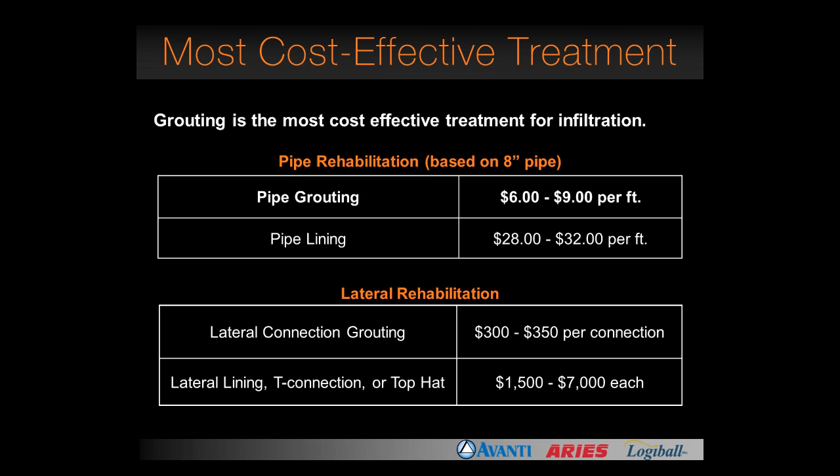If you look at the lateral connection, grouting a connection might be $350 per connection. If you put a T connection, or do lateral lining or a top hat, you're looking at anywhere from $1,500 to $7,000 per connection. So there's a big difference in cost, and I really want to emphasize that municipalities need to know that lining and grouting work together. You don't have to choose one or the other.

This is a well-known case study from the city of Sunrise, Florida, from 1992. They were measuring flows at the pump station of 720,000 gallons per day. The city sealed 500 feet of 12-inch pipe, with joints every 5 feet. They used 700 gallons of grout at a cost of about $6 per mixed gallon, so they spent around $4,000 on grout.

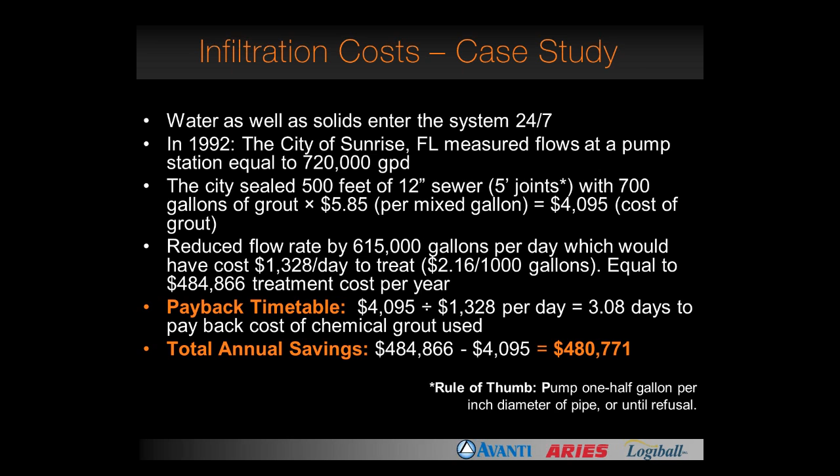They reduced the flow by 615,000 gallons per day, which would have cost about $1,300 a day to treat, based on the $2.16 per 1,000 gallons they were paying to treat the water at that time. So the payback timetable, taking the cost of the grout divided by the treatment cost per day, they made the money back in 3.08 days, and the city saved $480,000 that year by using a chemical grout program.

Many of you may be familiar with Dr. Vipulanandan. He's the head of CIGMAT, the Center for Innovative Grouting Materials and Technology, and chair of Civil and Environmental Engineering at the University of Houston. He's got a well-known white paper out; if you haven't read it, we can send it to you, just let us know. He concludes that to date, the only proven method of stopping infiltration based on cost effectiveness and method of leak repair is chemical grouting. So I hope that answers some questions for you.

Don, I'll turn it back over to you, hopefully for Q&A. I'm going to try to... Daniel, I think I already got it. I think we're in business. You got it. Okay, great.

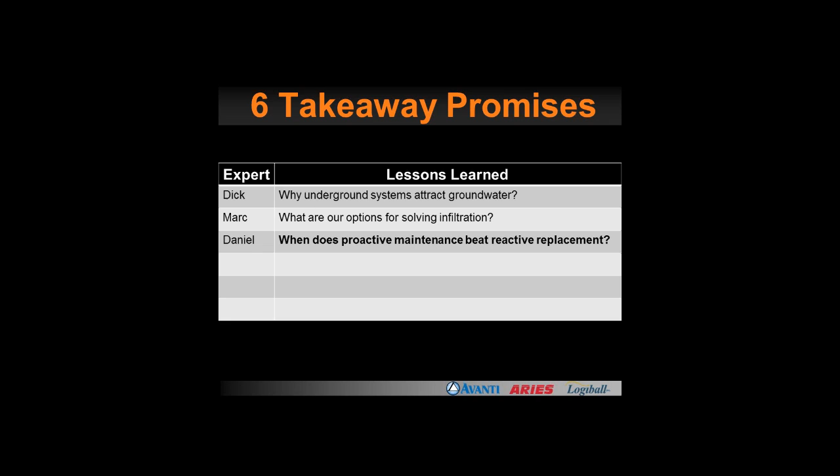And Daniel, when does proactive maintenance beat reactive replacement? The short answer would be always. It's always cheaper to maintain it than deal with an emergency after failure.

Dick, what is meant by a systematic approach? If you follow a system, you're going to get predictable results. That's why. So a systematic approach is a documented procedure that you either know or understand that you follow to get the end result.

Well done, Sarah. That's it.

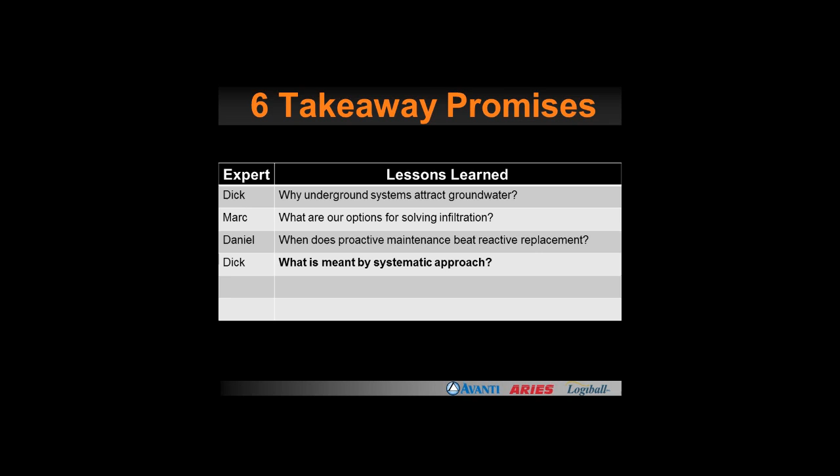And Marc, who benefits from controlling infiltration? Everyone. From the wastewater operator, the taxpayers, collection system managers, elected officials, everyone's safe. When you're addressing infiltration, you may not have to go and build a new treatment plant to accommodate all this infiltration going to the treatment plant, or upsize it. And you look at reducing SSOs and the quality of our rivers, streams and lakes, everybody's a winner.

Daniel, can we eliminate infiltration or just control it? I think it's a great question, and my answer is yes, you can absolutely eliminate it. The key is you got to address it as a system. You can't just focus only on the main lines or only on the manholes. You've got to address all 4 points of entry and tackle it as an entire system.

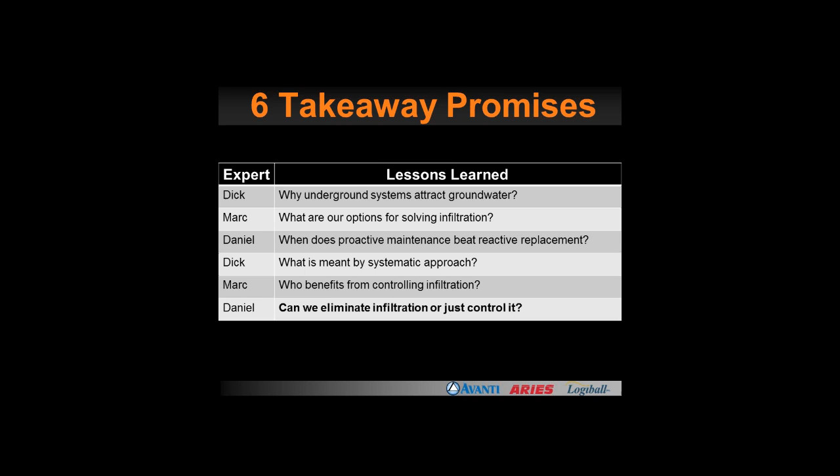Well done. We are now entering into question and answer. I've got 5 minutes left on the clock. This is going to be wild to try and get to most of these questions. If I can't get to them, we will certainly respond to them electronically by email. But here's one I think Dick can best answer, phrased as the million dollar question.

After we complete a test and seal cycle, how many years until you repeat the process? I think you would do it as part of a normal clean, TV, test and seal. If you're doing it every 5, 10, or 15 years on your system, you're going to come back in that time and do it. You're going to test and seal the joints that fail, but you're going to test all the joints again, end to end, manhole to manhole. Clean, TV, test and seal, and then do your evaluation.

This question may just tie right into that as well. Daniel, you might be the better source on this. What is the life expectancy on this work?

The grout itself, the U.S. Department of Energy studied 7 different types of grouts to determine what they wanted to use to encapsulate radioactive waste. They gave acrylamide grout a 362-year half-life in the soil, so it wants to be underground in the soil. It'll last a long, long time. The question is really, was the work done properly and done well? Did they put enough grout outside the pipe into the soil to make a difference and support the pipe bedding? So it's difficult to answer. We typically say if it's done right, it'll last the life of the structure, and that's our best answer for it.

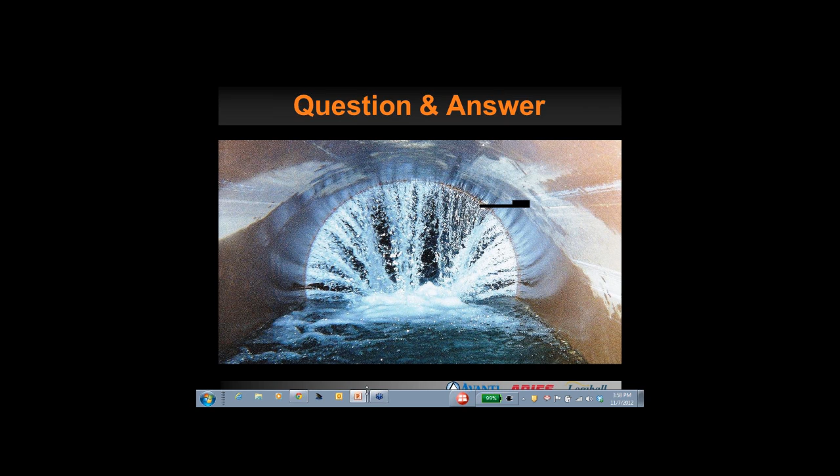Okay, yes, I think I can answer that. I think there's two things you should look for. One, you certainly should make sure they have the chemical safe handling certificate. That's very important. The second thing is, I believe it's important that they attend some form of a grouting school and have a certificate confirming that they, in fact, participated and have passed through that education process.

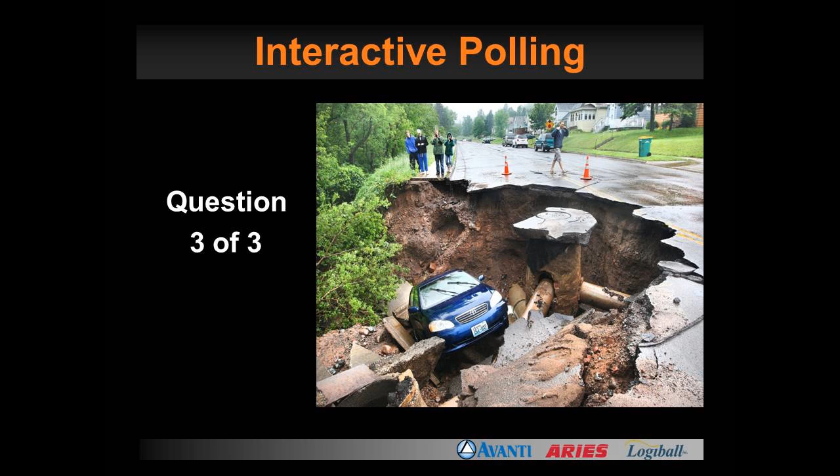Well done. I'm going to ask one more question on an interactive basis, and then I am going to move very quickly to recognize the time. I have just launched an interactive poll. It looks like you're being asked, as a repair practice and rehab strategy, what's your perspective on chemical grout?

And the answers are coming through, and I didn't expect this one to be as fast and as simple. You have to think about this a bit. More than half of you have voted. Well, we're making good progress here.

I think I'll go ahead and close this down and share with all. Presenters, I don't know if you can see this or not. It looks like yes, there's an openness to using chemical grout. There are some specialty contractors on board, and already chemical grout's a best practice. Good, we've got a nice mix of folks on this thing, and this has been a real joy for us.

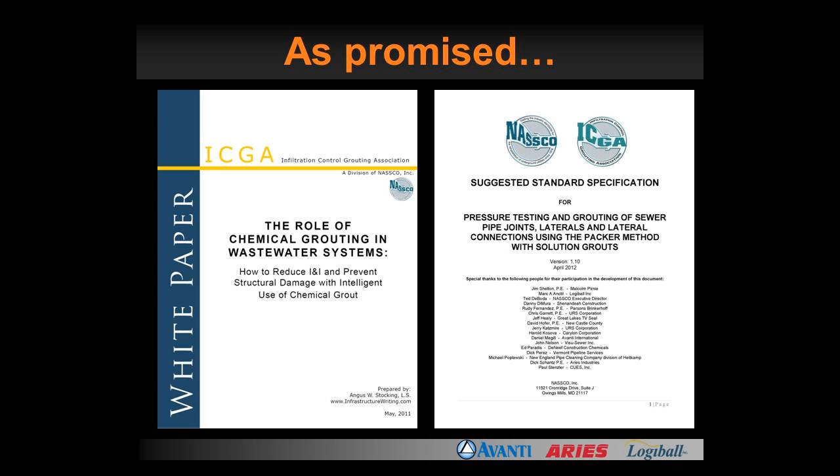Well, this is Marc. I'd like to thank you for attending our first webinar, and I hope you found it interesting and educational. Chemical grouting is not the solution to all your sewer problems, but when it's applied correctly in the right environment, it's definitely going to help municipalities stretch out those rare rehab dollars. So thank you for attending.